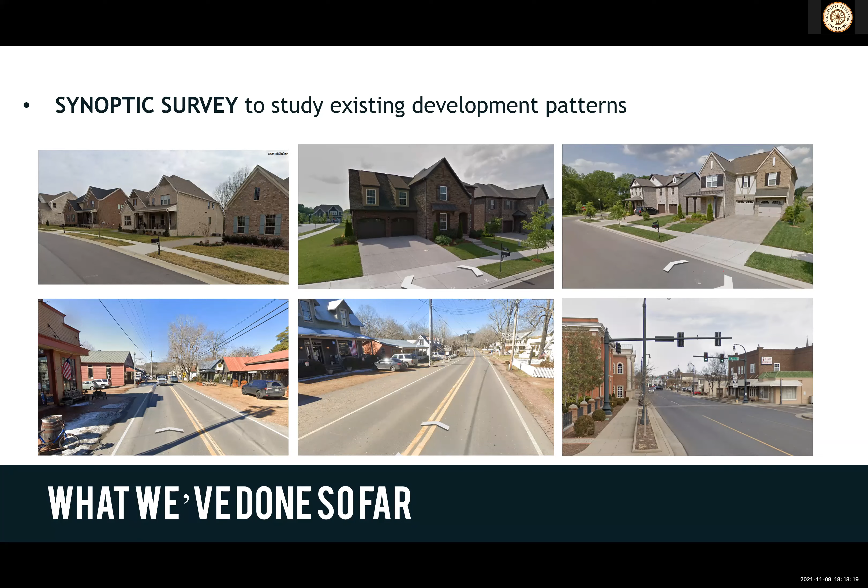So we're also looking at your existing zoning. As we've talked about, we're focused on the character of the community and the way it feels, how you experience it as a person, rather than just the uses. So we're taking your use-based zoning districts and translating them into character.

We started to realize that some of them have very similar characteristics. The differences are so small, you would even wonder why they're separate districts. So we started to consolidate a few.

We've then taken your zoning map, and using that translation table I just showed you, started to create a translation of what your zoning would look like into these different character districts. I'll tell you more about character districts in a minute.

But as we go through the process, we'll refine this, because right now, when you use the translation table, it doesn't take reality into consideration. It assumes that all your zoning is accurate and correct, and that everything built in the town actually is in compliance with the current zoning that it's zoned as, right? So we have to look at those sorts of things.

And then we'll start to refine this as we go, so it won't be just a pure translation. We'll actually apply zoning and planning concepts to it, and things we've heard from all of you in the community about what you want to see in the future. So it's sort of the art and science of it. But at the end of the day, this will become your new zoning map.

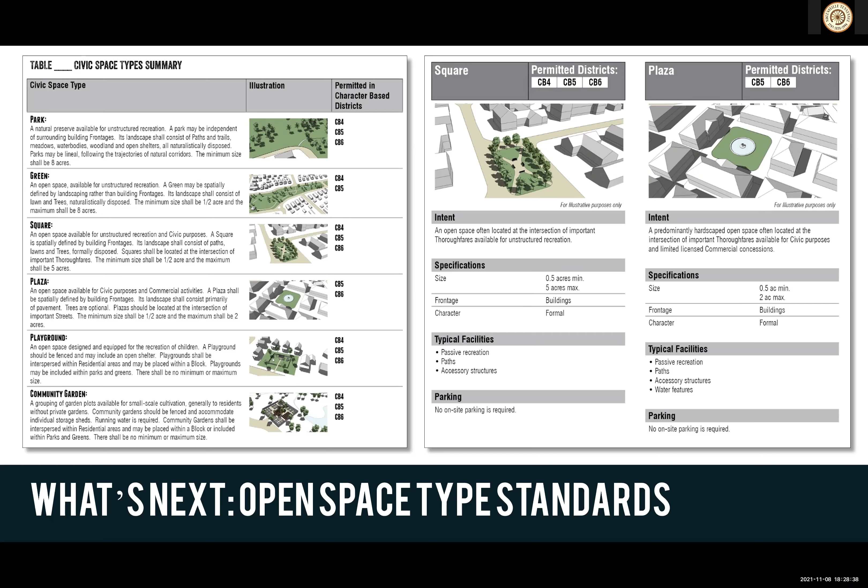Open space types, we talked about that. We'll have very specific standards, parks, greens, plazas, greenways, all of those types of things will be in it. Signage standards that are appropriate to the rural and small town context.

One of the things that I see a lot of times when you go to a place that does have small town charm, it's like they have the most amazing sign designers in the world. How do they all find this small town? And there's somebody who knows how to make these great signs. And then other places we go, it's like they have the catalog, for signs.com or whatever, and you just order it, and it's the plastic and the lights inside, and it's like it could be on the highway, it could be in a strip mall.

Here it is in our village, and no matter how hard we try to make this building look great and have small town charm, we've got this sort of hideous sign on there that just takes away from everything. So we'll have appropriate sign types as well.

So then we will begin to create the final document. We've begun, we've got a draft cover here. So let's talk about character districts. We've moved away from use as the most important thing.

We've been trying to listen to what you've been saying, and so we've created these drawings specifically for all of you, based on what we've heard. If you hate them, we need to know that too. Hopefully you'll love them like we do.

We talked about this idea of a continuum from the most rural, natural area to rural, to suburban, to general village, and moving on. Everything has its place. It's not a one-size-fits-all solution. That's key, because not everyone in Nolensville wants the same thing. We want to make sure everyone gets what they want, without precluding other people from having what they want in the process.

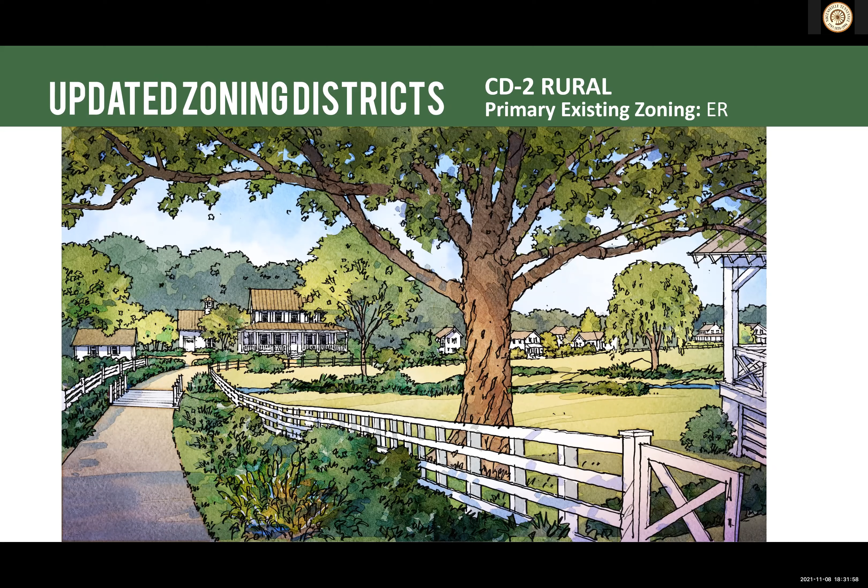Going from the edge more towards the center, you have plenty of existing neighborhoods already built. These fit more in the CD3L, suburban large lot. We've taken the SR and SR1 districts and lumped them into this one, so the idea is to transform them, or have them stay how they are. We looked at what percentage of the land area is currently in conventional suburban neighborhoods, and it's a pretty good amount. I don't know if this will be used for new neighborhoods or not, but you'll have what you have.

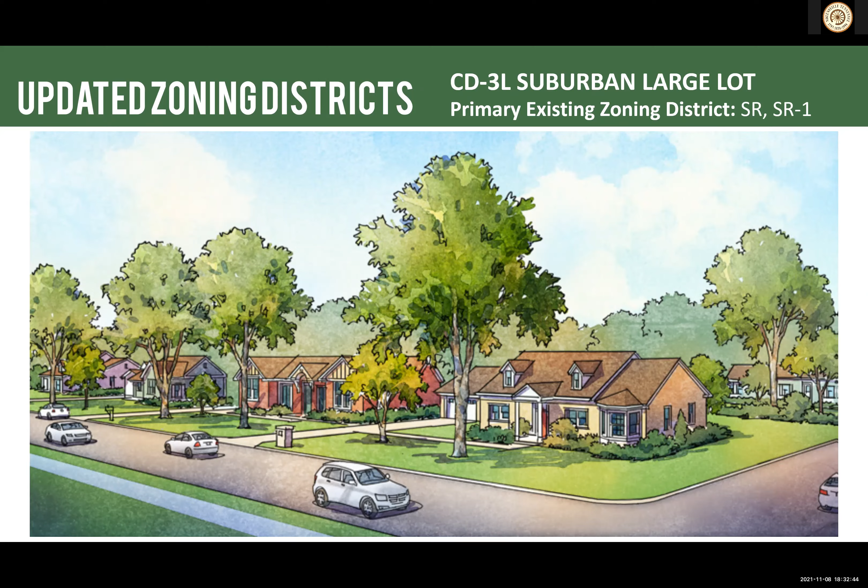Here's the CD3 Suburban. This feels a little bit more village-esque. You can start to see the sidewalks and street trees, the houses are a little closer together, and people are talking to each other across the way, doing all the things you do in a neighborhood.

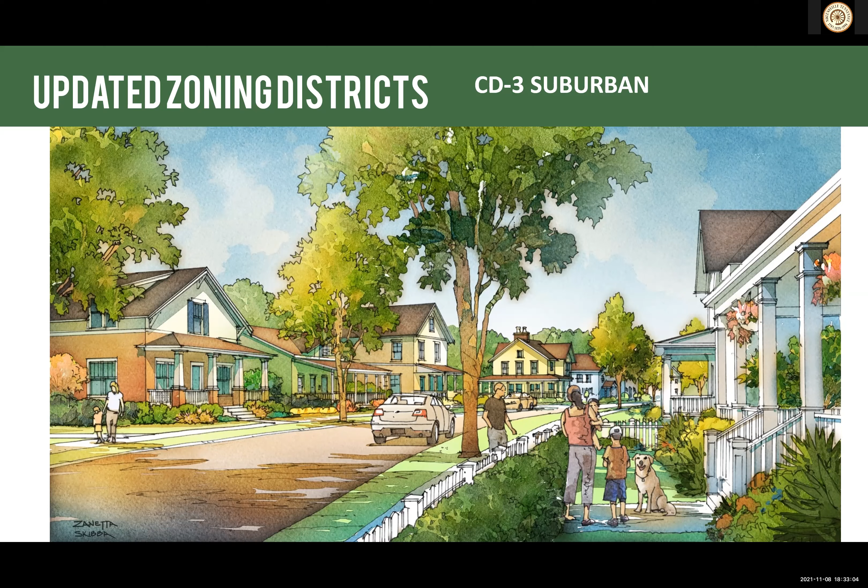This is a fun one, we got excited about this. This is the CD4 Historic Village, so it's got its own district. I'll show you in a minute - I'll skip past this because I have a before and after, since it has some transformational aspects, so stay tuned. The idea is to keep the character like it is, infill a little here and there, do some things that aren't done yet to make it even more special and exciting, and feature it even more as it ties in with new village development.

So here's the CD4, urban village. This is an interesting zone, actually the most interesting zone in a lot of ways, and here's why. In this image, this moment has your creek, no crawfish, but a single family detached house, a multi-family apartment house, a mixed-use neighborhood-scale corner store, live-work units, and row houses by the park - all in this one moment, around this one civic space.

I've been telling you all along that these things can go together. Not just go together, but be awesome together. Imagine if this was only detached single family houses - not bad, right? It's a nice park and all of that. Now imagine if it were only townhouses.

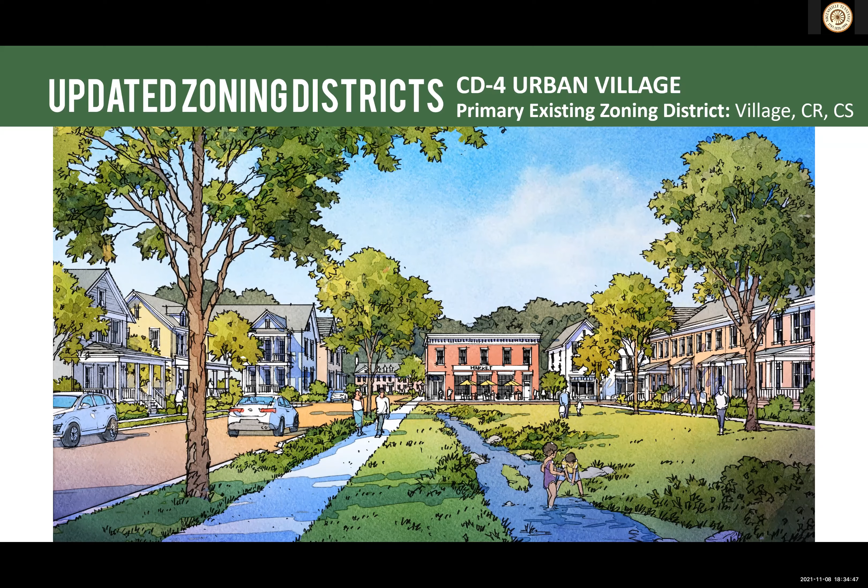So we are looking at, do you need any regional retail commercial stuff? Right now you don't have big box, and people ask us about it. This is a renewal we've done before, this is a reuse, but here's sort of the big box. The idea is that along the highway, you have buildings pulled up to the street. They're a little bit pedestrian focused, but also auto oriented. So you turn in here, the parking is still hidden behind community gardens and greenways and all sorts of things. There's a pharmacy with a drive-through in the back and some of these things. We're not sure if you guys need this or not yet, but for economic purposes, do we need some big box? What do we do? So I just wanted to share this with you all.

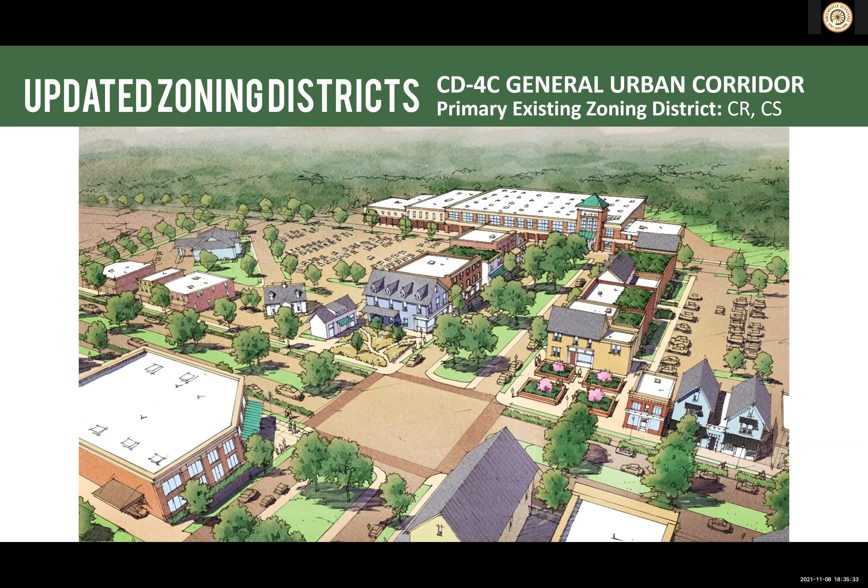Now, very different than the historic village, but because they're so close in proximity, you actually can have them support each other. And so that's one of the things that we're really excited about as well. So keep this in mind as y'all are thinking about the future of the more urban parts of the town.

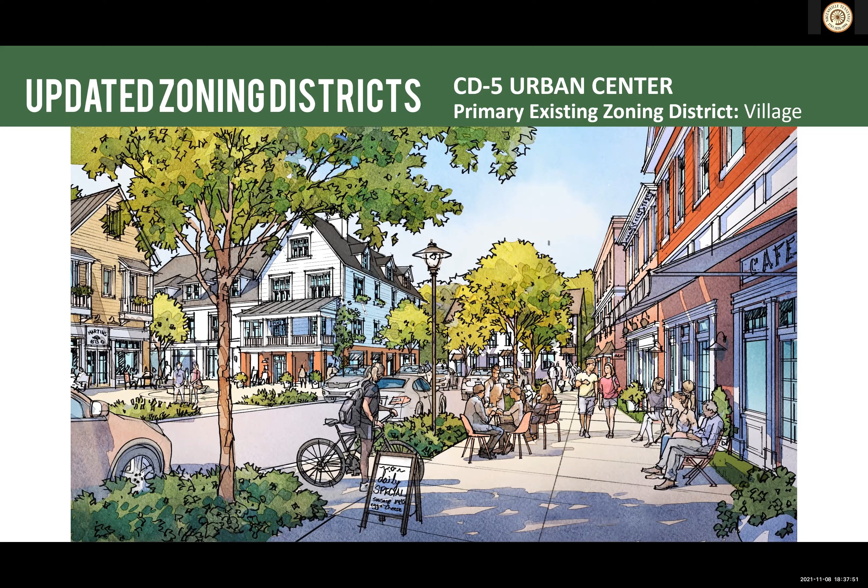You're like at 3 different locations right now. So I got the Martin's barbecue there, the right logo and everything. So we get into this stuff.

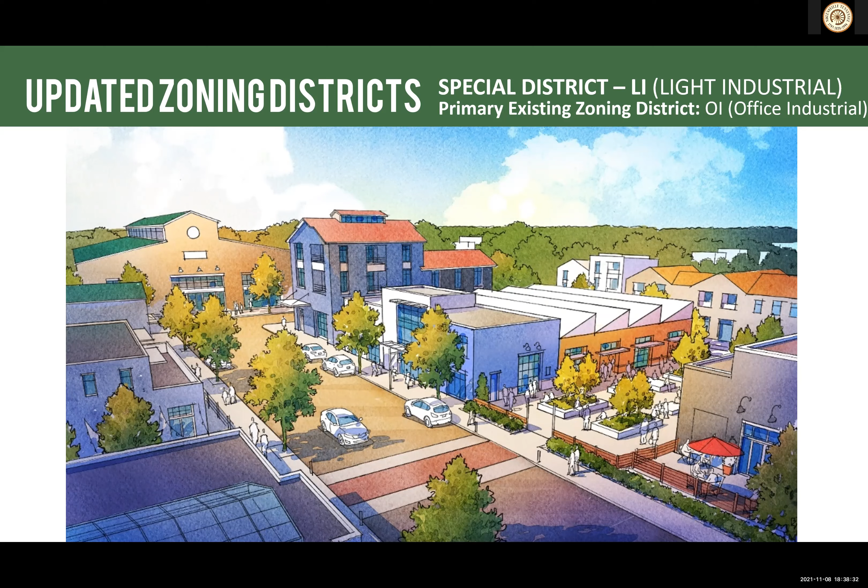Light industrial, right? So light industrial doesn't have to just be a wasteland, it can actually be really cool. And you all happen to already be going to your industrial areas and hanging out and going to the brewery and those sorts of things. So this is a model to show how you can have sort of larger scale industrial mixed in and have great places and have walkability. Imagine if you work here or you have a larger factory, and somebody comes out and they're gonna hang out and eat lunch out here. Maybe there's a soccer field right there they can play on their lunch hour or whatever. So even industrial can be cool.

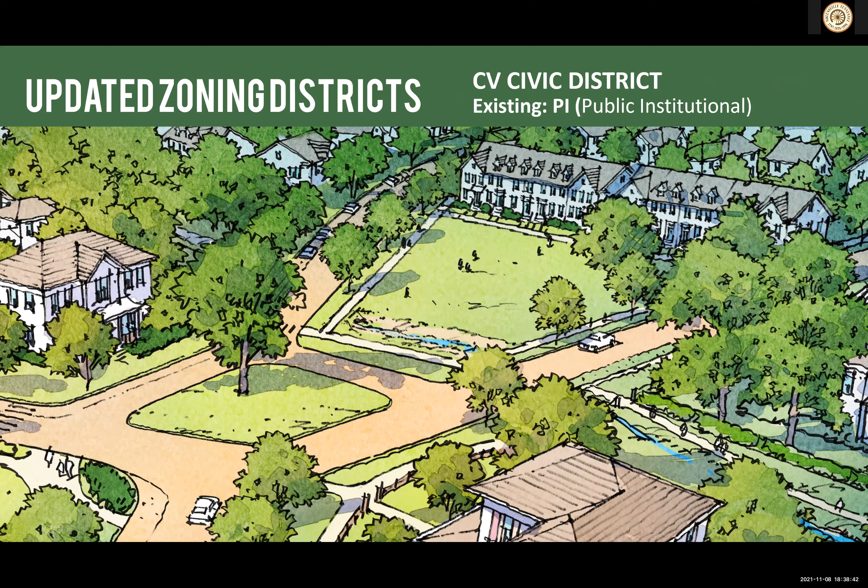And civic zones, right? So, as I said, parks, and there's another zoning district that's a civic zone as well. So we did a few demonstration areas, the character obviously is the most important part, but how does this translate to development? So I wanted to show a couple of things, 3 different areas.

We looked at this area here and created a traditional neighborhood development. It's about 90+ acres or so, and it's pretty close into the core, and wanted to see what that's about. And then we have what we're calling East Village. Everybody's focused on the triangle so much, and a little bit here at the intersection, but not so much over here, so we wanted to take a look at that, and then in the historic area as well.

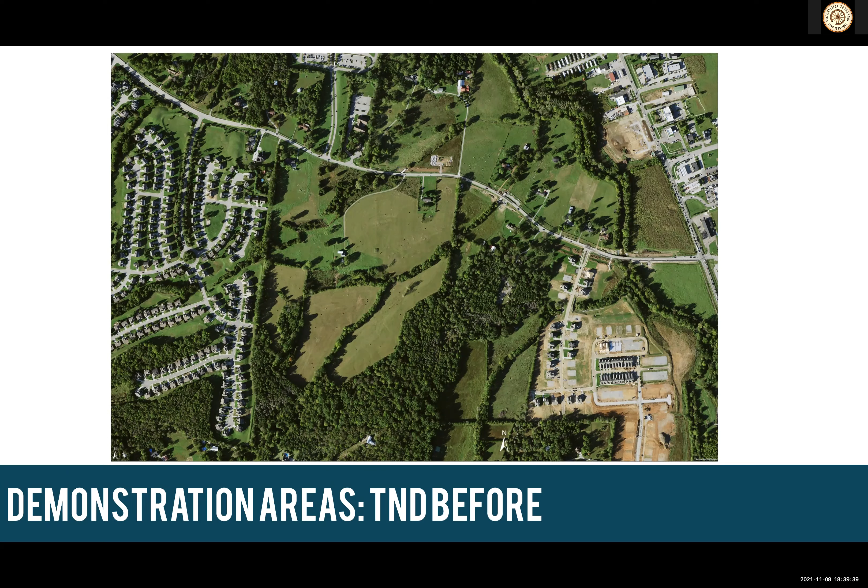So here is the TND, traditional neighborhood development area, before. You see there's existing neighborhoods, the roads stubbed in, there's all this existing vegetation, and there's some slope, topography and hydrology. And so here you start to see how you can put some of these neighborhoods in where you save the hydrology, the existing tree rows through here, you connect in the streets, connect in the great neighborhood centers with the park, a large area here. You actually can start to face the nature rather than backing up to it.

So we showed a little how-to, if you're going to do anything on the slopes, maybe some cool tree houses with a very small footprint that really work, nestled in the trees. If you're going to cut down any trees, it's just the footprint of the building. Some developers actually do that, believe it or not - they don't have to cut all the trees down and grade it all.

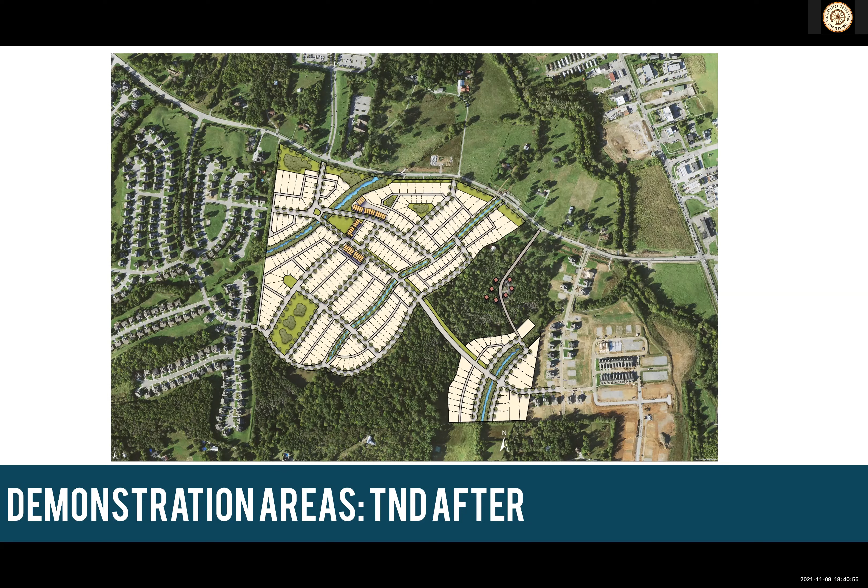So, here's the view, right? I zoomed in a minute ago. Oh, no. There we go. Yeah, that's well done. I don't know if you all give presentations or not, but yeah, so here we go. I'm going to go fast.

All right, so this is that green space into that - this space here, looking this way. I actually built a 3D model of it so you can see. Within this view, you have multifamily here, you have larger single family kind of coming in from the main road here.

You have the row houses, the green space, the hydrology, the little stream tributary saved there, and we've added a trail along here. This is a large single family house, smaller cottages here. Again, they all can actually see each other from here, and it's a great place.

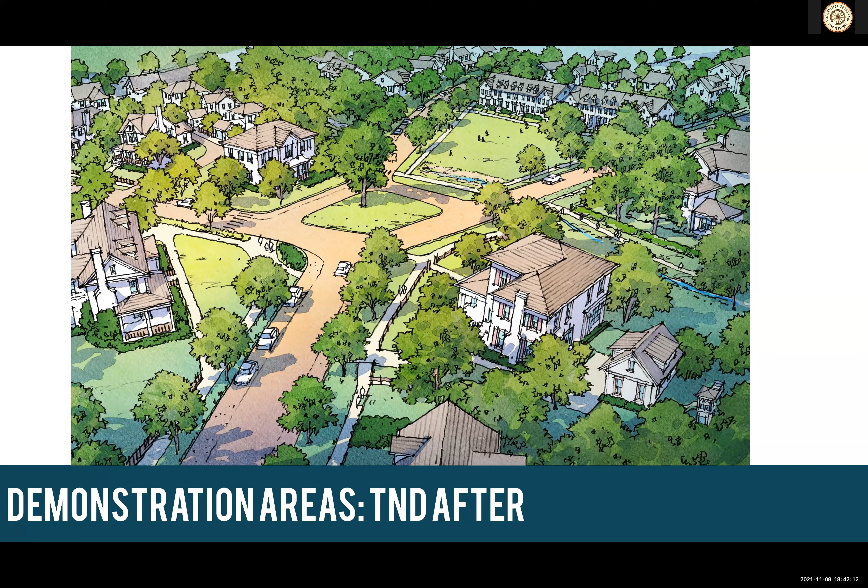You have on-street parking. We've shown little speckles here to show pervious paving so the water can infiltrate through, and these little tiny pocket parks. I actually told our renderer to do a little sustainable stormwater pond and wetland feature in here - he didn't get to that, I'll have to have a talk with him.

Okay, so this place is very special and very delicate, right? If you get too heavy-handed in here and you're not careful, you're going to goof it all up. So that's my warning to you as I'll show you how we did a lot of things in here.

But we noticed some really cool features about it. Obviously, the number one thing is the creek coming through here in close proximity. And I talked a lot about how Leiper's Fork is really a great example of how to have a sort of rural experience of the hamlet.

But the thing you have over Leiper's Fork is their creek is about a 30-foot drop down from the back of these buildings, so it's treacherous. You all can nicely walk out the back and walk right in, go to science class.

And so you also have a lot of kind of random open patches of things. You have parking sort of strewn around in a random way, not consolidated in any way. And you have the other thing that I was really excited about - the bridge and the trail.

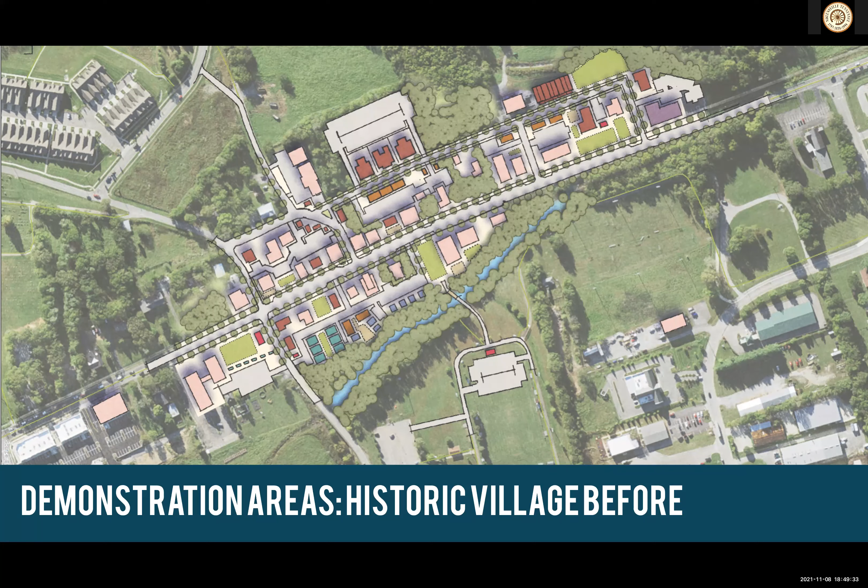The point of this isn't to say go do this exact plan. It's just to show you all the different concepts, how to make a destination, how to tie it all together. This one was more just kind of our gift to you guys, to let the other plans focus on other areas with the village too.

We don't mean to muddy the water, this may be one of the options, I don't know. But here's the things I love to focus on. Look at this.

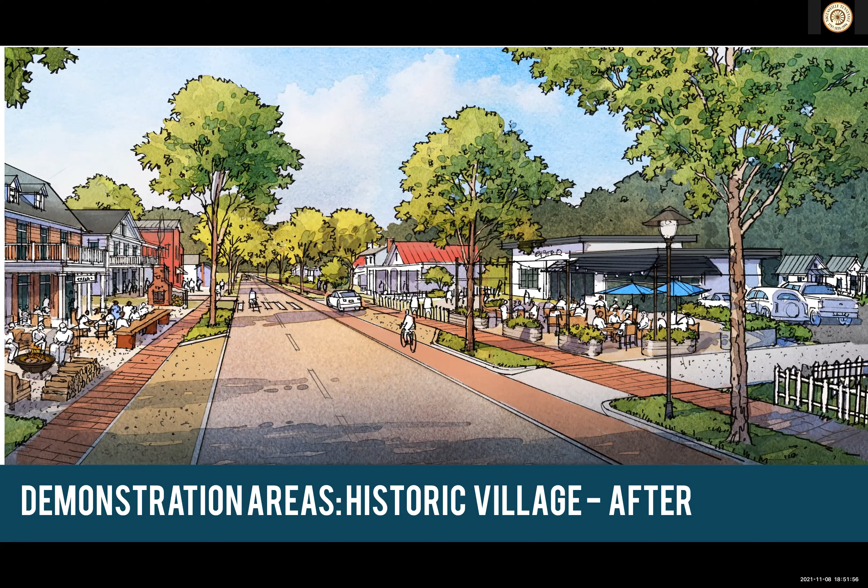So anyway, we had some fun with this, and it's great. Here's some inspiration, I don't know, I can't remember where this place is. I found this a while ago and just thought, whoa, this is so cool.

Pennsylvania maybe, oh here, of course this is actually in Leiper's Fork. So gravel, fresh gravel around, you know, when you're thinking about needing parking, don't immediately think you have to do asphalt. One, because it's impervious, and two, for that small town charm and character. The more you can hear things like gravel crunching under your tires as you're walking, it really makes a big difference.

And then these random little buildings, when you look at the downtown village plan you think, what's this little random square building? Well, it's the turquoise shop in Leiper's Fork apparently, or whatever. You wouldn't believe the number of things people put in these little spots, and that's what makes it so good.

So this is cool, artist shanties, this is what I was talking about before. You can imagine these are totally floodable and no big deal, you open the doors and hang merchandise on them, and at night you can shut them. We did a version of these that had slats in it, so you let the light on and it acts like a Chinese lantern, kind of glowing, a cool experience there.

Oh, here's that black bear, right? So between each of those buildings you see they have tables, awnings, and bistro lights, and the porches are connected, just really cool. These are just little, not expensive buildings.

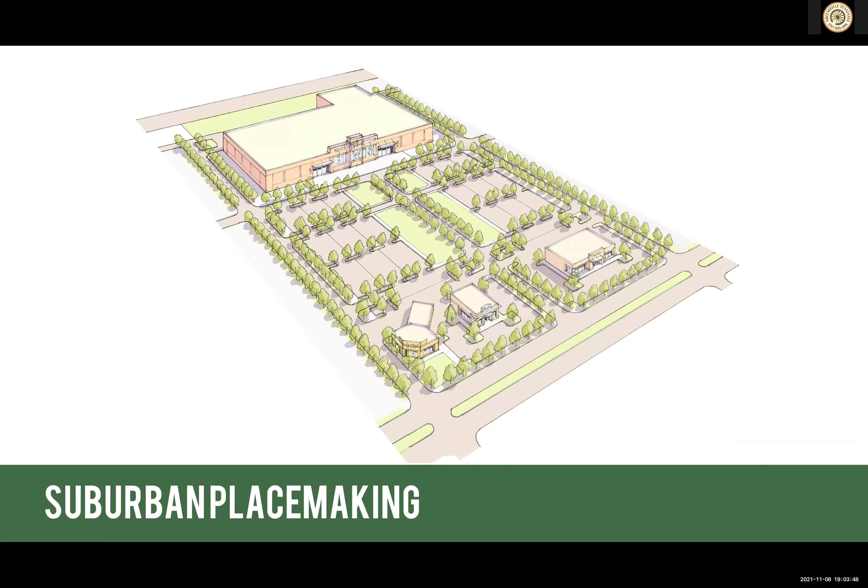So now we have a multi-way boulevard. This is a slip lane, a little side road, and this is where the main traffic flows through. This is for traffic that wants on-street parking in front of these on the big highway. You guys don't have much of a highway, so you're okay, but some places do.

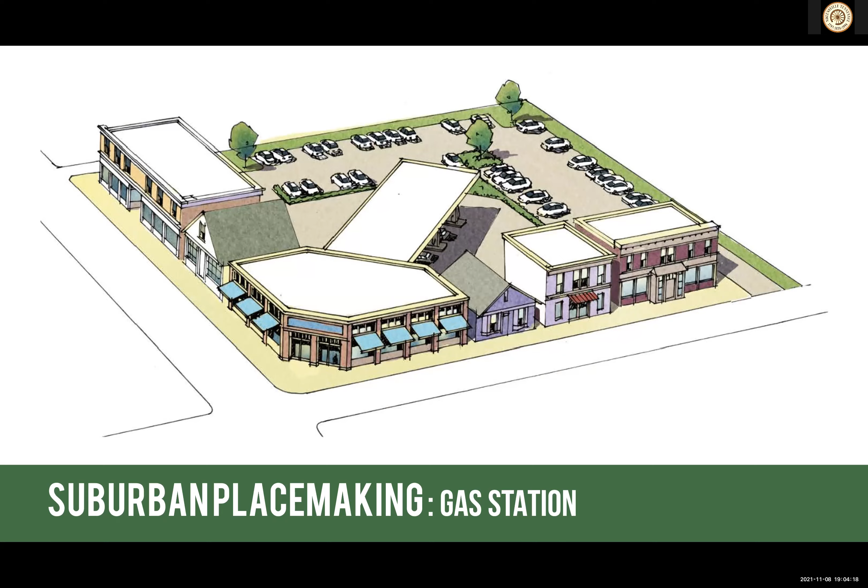Here's what the gas station looks like, pumps in the back, come through, go out, no problem. Here's a bank — do they even have those anymore? And a pharmacy, you can't even see it, but the drive-through is back there.

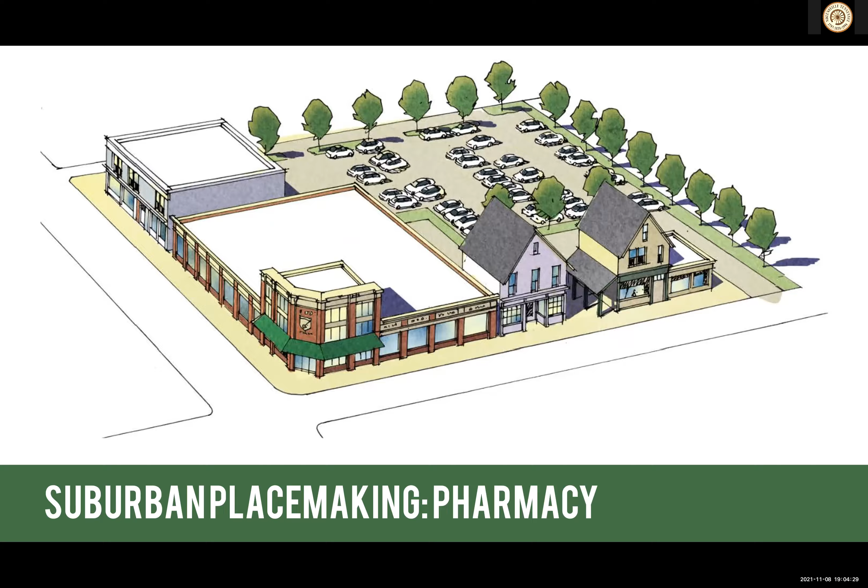One day you can easily infill along here, and you can have what I just showed you in the diagram earlier, kind of all of these things. And the grocery store doesn't care at all that no one can see it, just for what it's worth.

So, timelines and next steps. If you haven't already, go online and watch the videos. If you missed any meetings, or haven't done the mapping exercise, go do that. We are here for the Plan-a-Palooza.

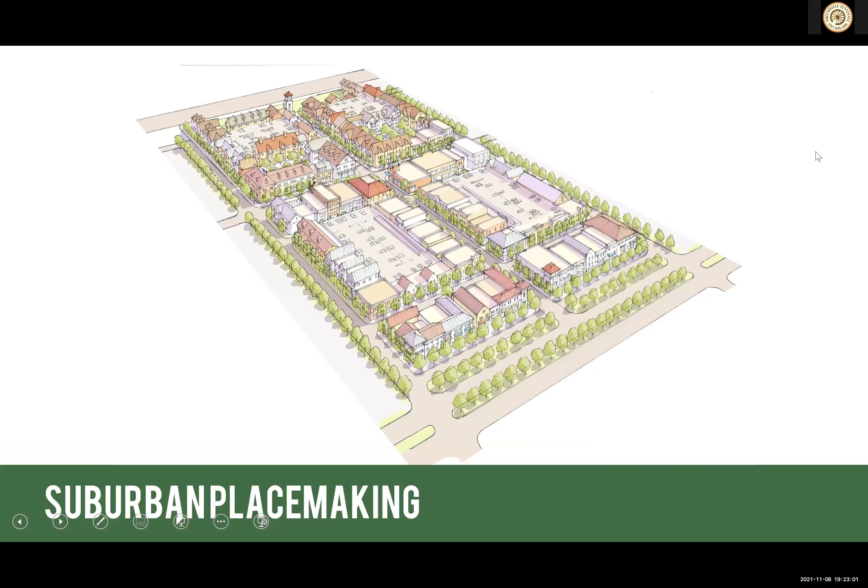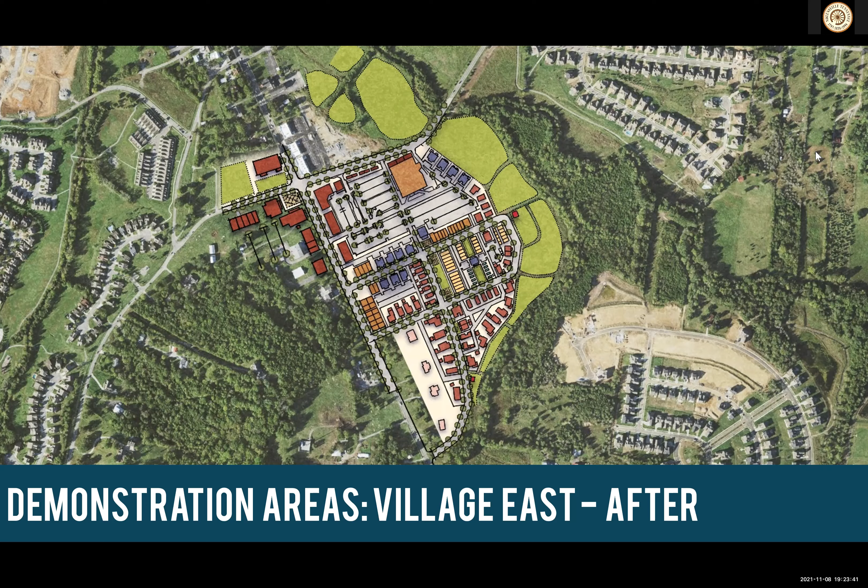So I think having everybody understand that the creek and the water and the floodplain are featured instead of feared. I think that's maybe the tagline. But we'll get into that further in the process.

We have an at-home anonymous attendee asking: will there be a key available for the village, before and after, so we know what buildings the town is thinking of having? Yeah, so we'll put a little key on the side that'll say existing and different types.

May I join late? I joined late, so I may have missed it — I'm not seeing any type of bypass or improvement to control the traffic. Yeah, so back to your point, the bypass is something I've essentially talked about already, just in a different way. By having these multiple parallel roads running north-south, really they're all the bypass — it's just broken up into different pieces instead of one main road.

So as you think about bypasses and bypassing, think about what it does, what it could do. There have been so many towns and villages around the country that were just destroyed by bypasses — the hassle of Main Street with pedestrians and bikers, so let's just go around. Franklin's in the middle of doing it — they built Mack Hatcher bit by bit, and now they're about to connect another piece, and maybe the last piece will never happen because of the crazy hills and topography. But I worry, if downtown Franklin weren't as strong as it is economically, such a destination, would it survive a bypass like that? I think there's not as many people who happen to go through a historic place and think, oh, I need a loaf of bread.